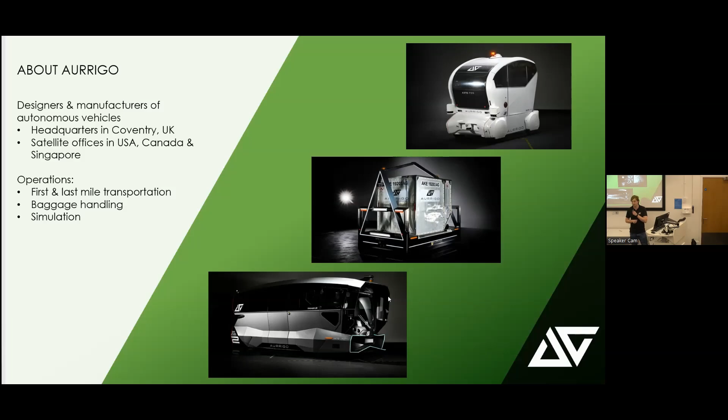So our niche is low speed enclosed environments - that's first and last mile transportation, meaning usually short transport from a bigger area of transport, like a train, to your final destination, whether it be the office or a stadium or something like that. Baggage handling is where a lot of the money is coming from at the moment - baggage handling in airports - and simulation as well, simulating airport operations.

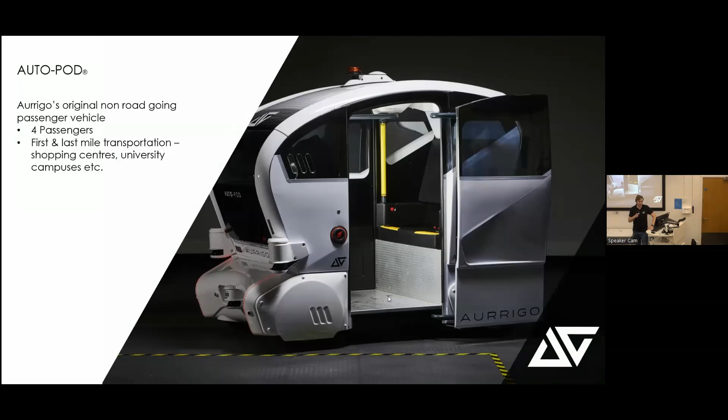I'll go over some of our vehicles. Our first vehicle that we created was the Autopod - as I said, it's for first and last mile transportation, and it seats up to 4 people. We have a larger version of this called the Auto Shuttle, which seats up to 8 passengers.

It's currently in use in the Czech Republic - it literally just finished this week. The vehicles are coming back as we speak, but we've just undergone a project in the Czech Republic.

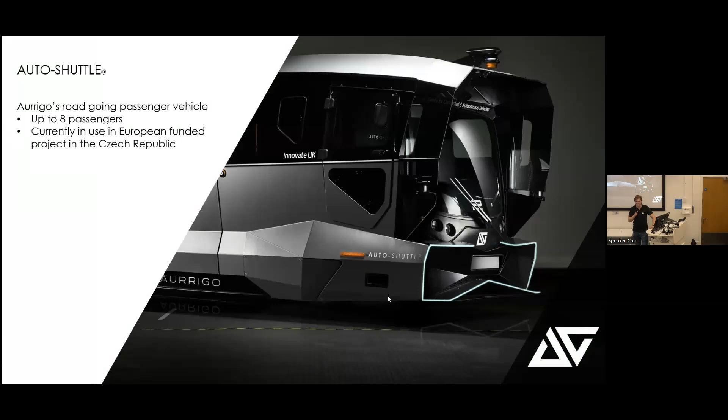This is our Auto Dolly. This was our first baggage handling vehicle that we developed. We trialed this initially in Heathrow and achieved very good results, and we are currently operating in Changi Airport in Singapore.

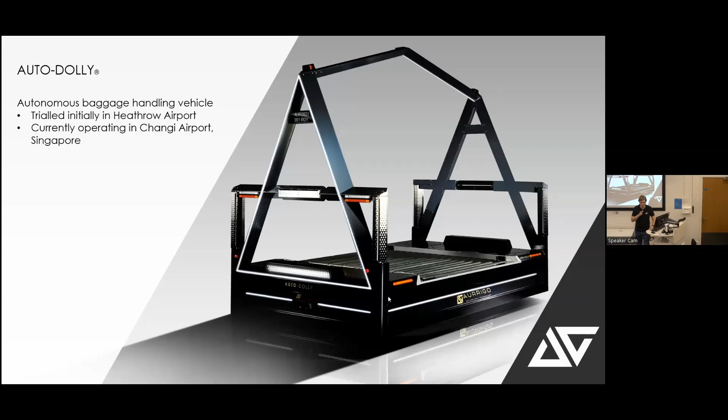We have the Auto Dolly Tug, which is a bit similar to the Dolly, except it's got more towing capability, so it can tow up to 3 manually towed dollies, each having a ULD. A ULD means unit load device - you'll see them at airports, they're essentially just crates that carry your baggage, and we take these from the baggage handling area to the planes.

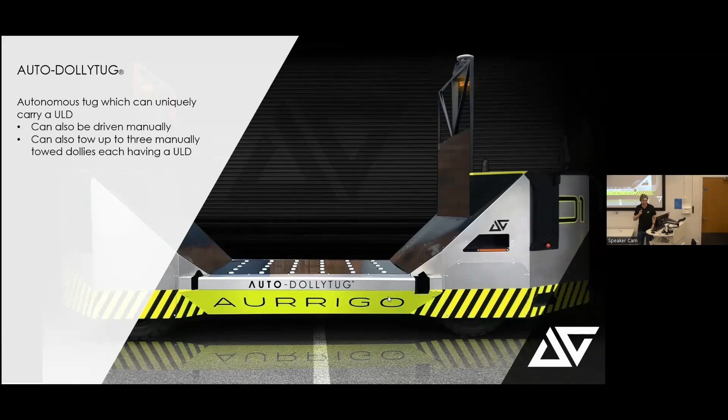I've got a short video describing how this works. If I just hit play.

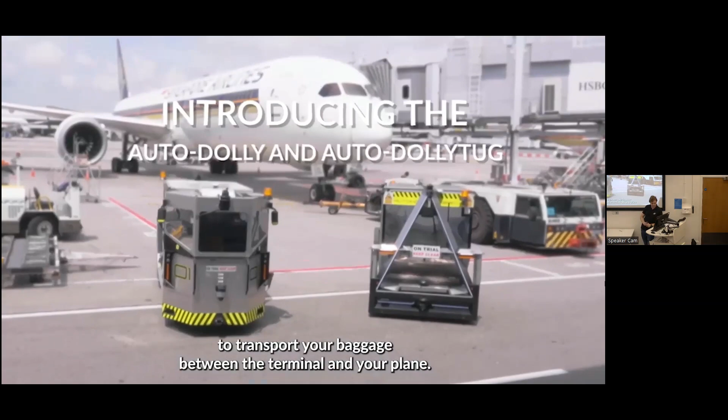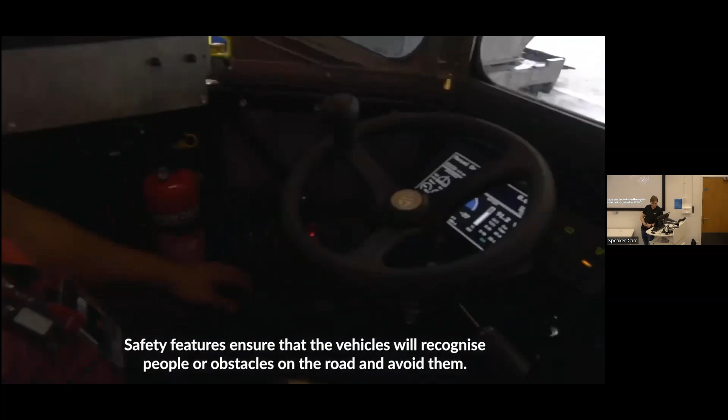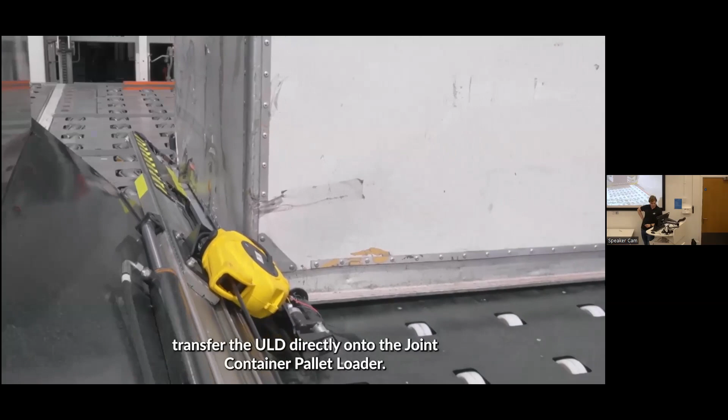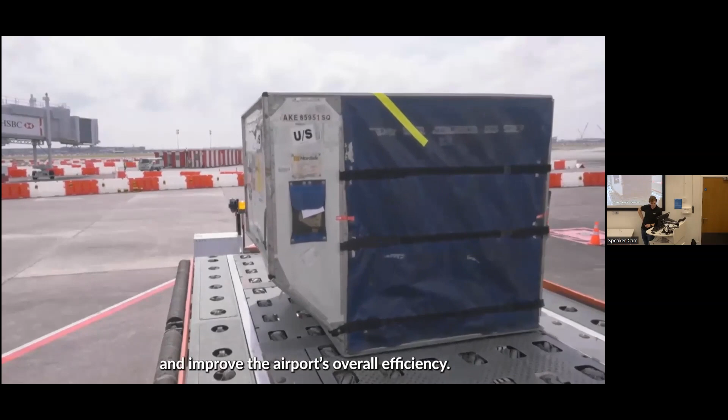Don't be alarmed if you see driverless vehicles when you next fly through the airport. They are part of a trial to use autonomous vehicles to transport your baggage between the terminal and your plane. These vehicles will first pick up a unit load device filled with your bags and autonomously move off to the aircraft stand. Safety features ensure that the vehicles will recognize people or obstacles on the road and avoid them. They are programmed to autonomously maneuver busy roads at the airside. At the stand, autonomous mechanical arms transfer the ULD directly onto the joint container pallet loader. With automation, drivers can be freed up to work on other critical functions and improve the airport's overall efficiency. Try to catch a glimpse of these vehicles the next time you travel.

I don't know if any of you are planning a trip to Singapore, but we are currently operating in Singapore, so you will be able to see us operating there. I love Changi Airport.

It's world renowned - oh, am I feeding back? Okay, no, here we go. Yeah, Changi Airport is world renowned, it ranks as one of the best airports in the world.

Singapore is massive on automation, not just in the air side, but in all areas - public transport and basically everything that they can automate, they are trying to automate, which is great for us.

Don't want to do that again.

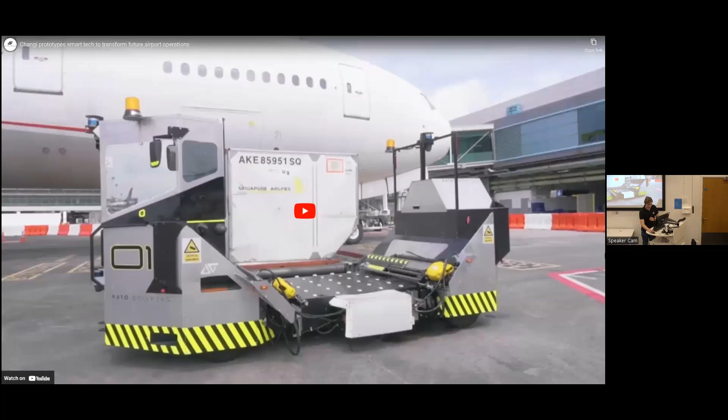So this is our most recent vehicle, the Auto Dolly Tug Mark III. This is the most recent iteration. As opposed to the previous vehicles, which have to be driven normally up to your baggage handling area, this can perform crabbing, basically sideways movement. The vehicle itself comes down onto caterpillar tracks and enables side-to-side movement rather than just forward and back using regular steering.

This allows it to also perform what's known as tank turn - essentially it can spin around on its axis by sending power in different directions to the caterpillar tracks. It can spin around and perform many more complex maneuvers that our vehicles couldn't previously do. And again, it's got robotic arms which can load and unload ULDs.

This is off to Singapore on Thursday, so I've been working today and we'll be working tomorrow on some final checks with the camera systems, getting that all set up and ready to go.

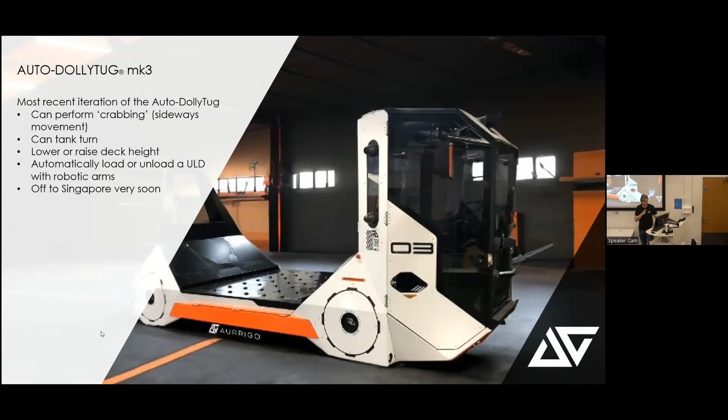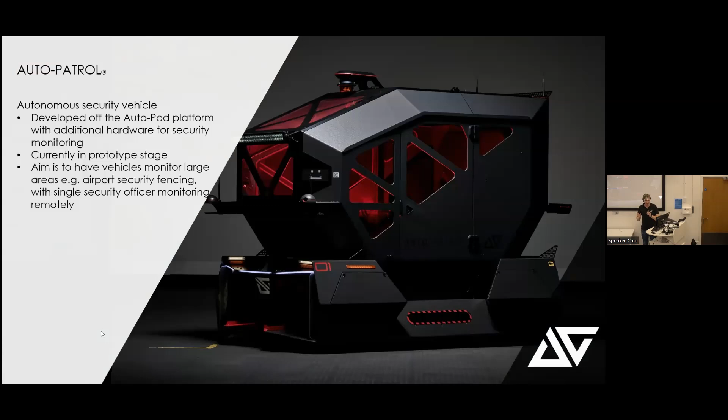Another vehicle we have is the Auto Patrol, based off our Auto Pod. It is a security vehicle aimed for monitoring large campuses, for example airport security. The aim is you could have a fleet of these vehicles traveling around the area you want to monitor, with a single person in a control room who can see the camera feedback from these vehicles and maybe even issue commands or warnings through the vehicles themselves.

I've just got a quick video of the Auto Patrol.

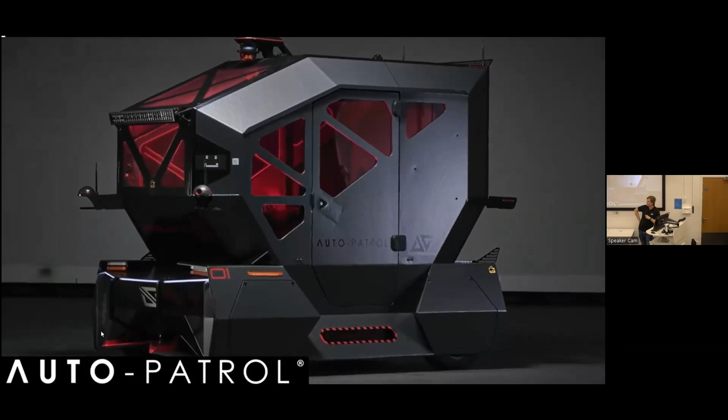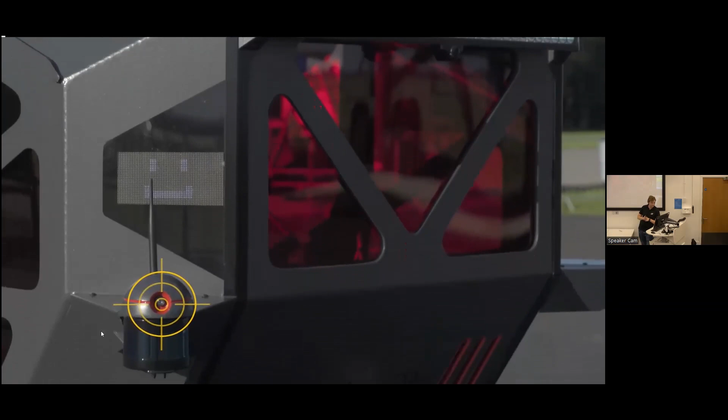Introducing the Aurrigo Auto Patrol, a vehicle to automate your security and reduce employee costs. Auto Patrol has been designed to enable autonomous, unmanned, remote security and surveillance. It has long-range, high-resolution stereo color camera, a tethered drone option, and LiDAR image detection. The vehicle does not require a driver or operator to be physically on board, which will decrease overall operational costs, and through the automated technology, improve the accuracy of security risk detections. The Auto Patrol can be operated autonomously or with onboard employees. Aurrigo Auto Patrol.

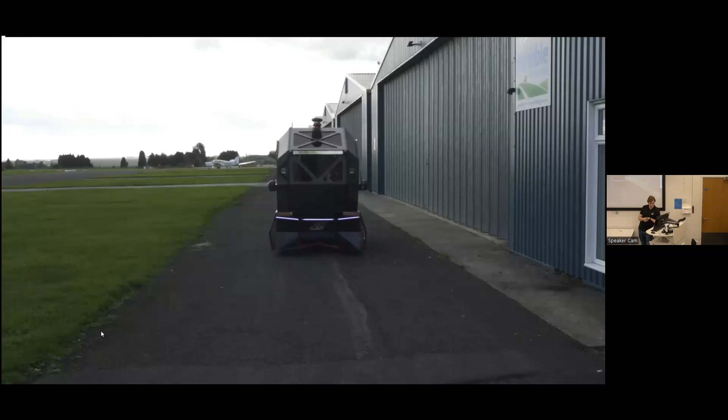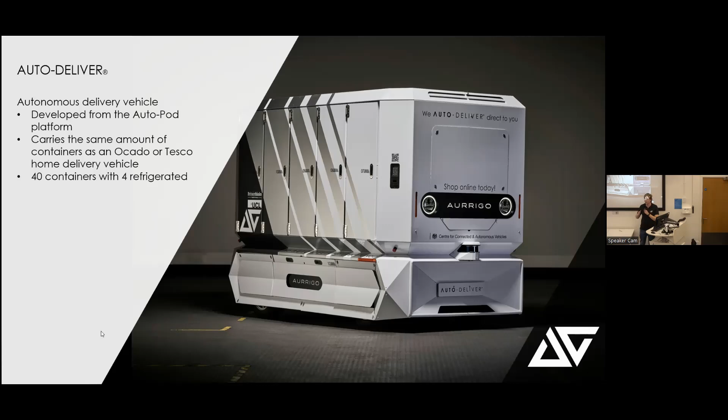Okay, so that's our vehicles. I think we've got one more, which is the Auto Deliver - essentially a delivery vehicle. It contains chilled and unchilled containers. Essentially it's similar to your Ocado or Tesco home delivery vehicle, except it's autonomous. This is just a prototype; we haven't gone into production on this just yet, as we're focused on our Changi operations.

And then finally, we do airport simulation, which is essentially a digital twin of an airport. This was born out of requirements for Changi Airport, where we had to model the airport and prove that our vehicles could operate autonomously in the environment, and that worked well. And we thought, why not scale this up to model the whole airport worldwide?

So our system shows clients how savings can be achieved by electrifying their fleet. It also shows you how the fleet travels around an airport, what kind of congestion can occur - say if you decide to close a gate, how that affects both foot traffic and vehicle traffic to the stand. So we're obviously working with Changi Airport, and we're also developing a simulation system for Grand Rapids Airport in Michigan, USA.

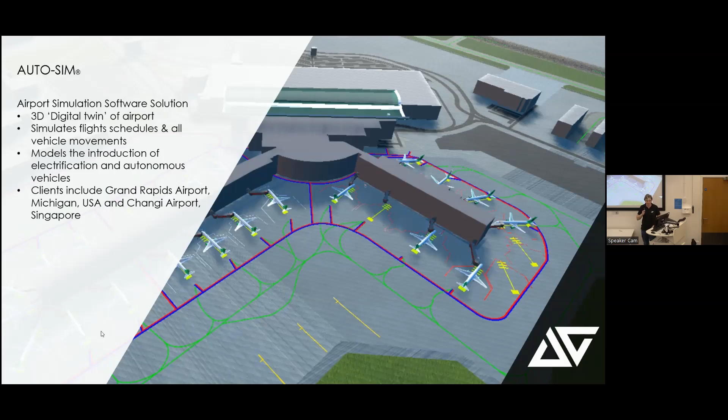So the main reason I'm here is to talk about academia and industry. We have a number of university partnerships, not just here in the West Midlands, but all over the world. Just some examples of our clients: WMG at Warwick, the University of Ottawa, and University College London, just to name a few.

So one great way of getting involved with academic research as a business is the Knowledge Transfer Partnership, or KTP. This is what I was part of when I graduated and joined Aurrigo. It's a 2-year project that links a graduate with a business and a research institution. I was the graduate, the business was Aurrigo, and the academic institution was Aston University. It's funded by the company, the university, and Innovate UK in a 1/3 split - great savings for the business, as we only need to provide 1/3 of the funding.

So my KTP was with Aston from 2020 to 22. It's got a fancy title: to develop and implement a sophisticated machine vision solution for autonomous vehicles in low-speed environments. Essentially, before I joined, the company wasn't using any sort of computer vision at all - it was solely reliant on LiDAR for all of its operations. The benefit of cameras is that they're cheaper and more readily available, but the difficulty comes in getting the information out of the box. A LiDAR can give you a point cloud - you can plug it in and it'll give you a point cloud there and then, whereas with cameras, you need sophisticated software to do depth perception and object detection, and that was the whole point of my KTP.

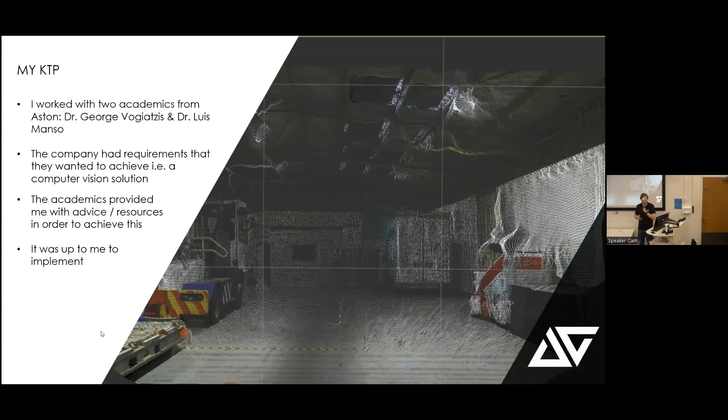I showed that monocular depth estimation could be possible, and that it was a benefit to their business, because usually stereo cameras are used for depth estimation. Stereo cameras by design require two separate cameras in order to calculate the disparity and therefore the depth. With one monocular camera, you only need one, so that's a saving of half on all your cameras if you were to implement a purely monocular-based approach.

I do have a video of the KTP. This might be a bit long, so I'll cut this off if it goes on too long. We'll see what happens.

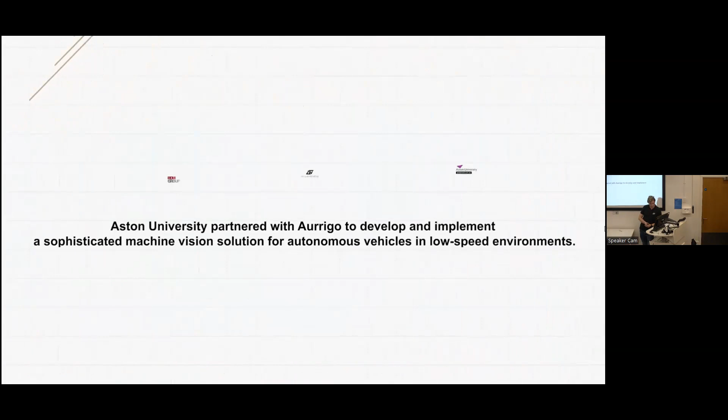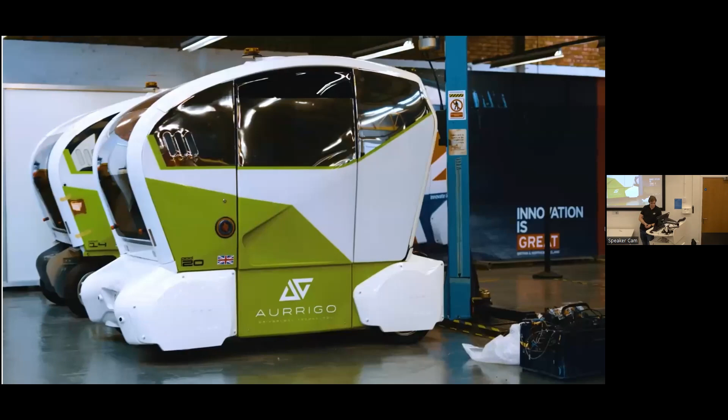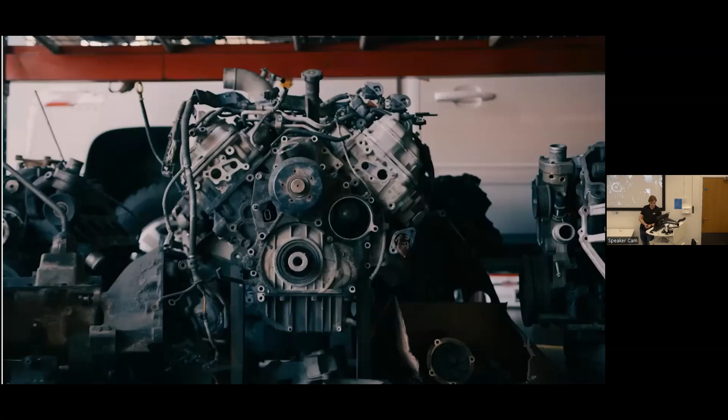My name is James Heaton, and I'm a machine vision engineer here at RDM. RDM has been in business for about 30 to 40 years. They've recently been making bespoke parts for other companies in the area, such as Aston Martin and Jaguar Land Rover, and recently launched a sister company called Aurrigo, which designs and manufactures autonomous vehicles, ranging from 4-seater pods to 10-seater shuttles. They're usually used for first and last mile transportation, and they also have a third product, the auto dolly, which is designed for autonomous baggage handling at airports.

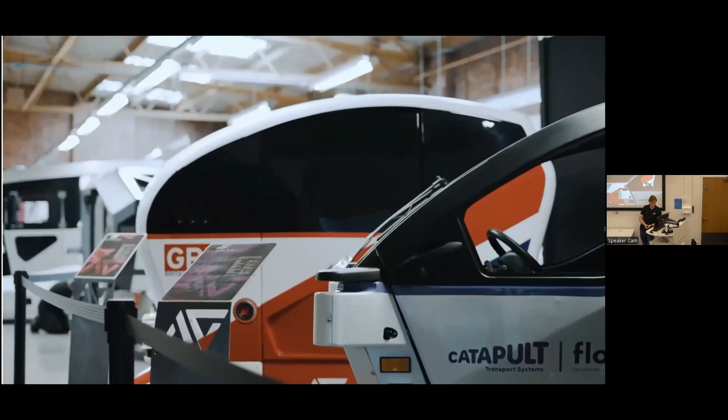This is a very innovative project because it's essentially trying to take an existing autonomous vehicle platform to a higher level of autonomy. So what we're trying to do is eliminate the need for a human supervisor to be there when things go wrong, essentially. We want the pod to be able to make those decisions autonomously without any need for humans to be present. A lot of our competition are either the manufacturers of the vehicles or from the operational side of it. As a company, we took a decision to bring this all in-house, so all of the vehicles are manufactured in Coventry, and we have engineers here currently working on that.

KTP is a self-contained project between a university and a company in a specific industry. I'm a KTP associate, so I've been brought in to complete a particular project, working with both the academics at the university and the management team here at RDM. Prior to me joining RDM, they had been using lots of different kinds of sensors on their vehicles, and the purpose of this KTP was for someone with some machine learning experience to come in and develop a camera-based system to detect objects and control vehicles.

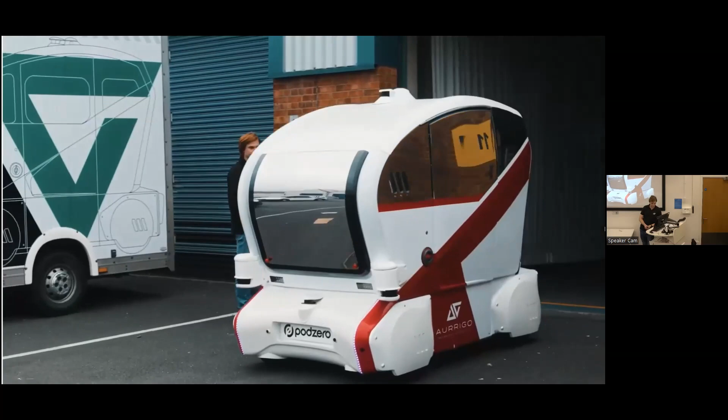So at the start of the project, we set out to achieve a few things. The first was to develop a simulation environment. That has been completed, and now the next step is to look at developing the camera-based perception systems using machine learning. The aim is to make these vehicles safer, cheaper, and more reliable, which only stands to improve the standing of Aurrigo going forward.

I think the biggest challenge for us academics has been to come to terms with the level of scientific rigor and safety features that need to be built inside these algorithms. Because it's all fine and nice when you're just developing a simple prototype, but when you're actually implementing something on a live vehicle that will be released amongst real people, you cannot afford anything to go wrong. So for us, proving that the algorithm does what we wanted it to do was quite a challenge.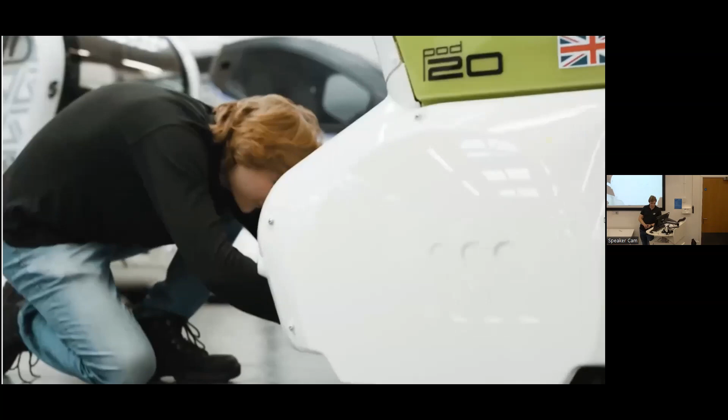Working with both industry and academics means more support whenever I have a problem. For a place like Aston, this type of ethos is almost built into the fabric of the university. We've had quite a lot of involvement with industry almost from the very beginning. All of the work that we end up doing in terms of research either has a very strong applied segment or leads towards some strong application area, which means that with all of the work we do, the end user and the end system that is going to be built is always in our minds.

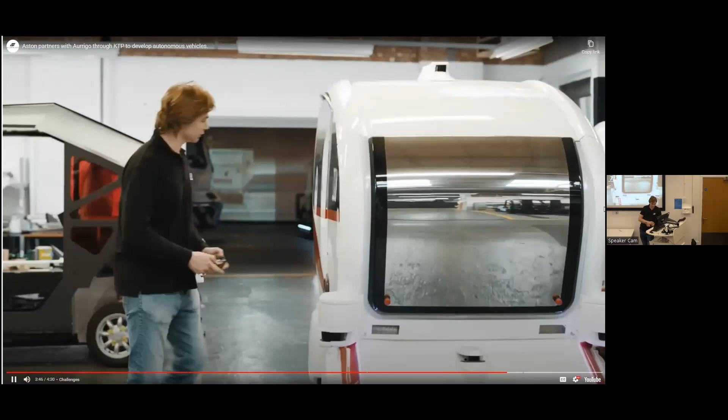So the nice thing about these KTP projects is that it takes this idea to the next level. So they fit very well with our understanding of what research is really meant to be doing, meant to be solving real problems, not just being able to prove that you can generate data.

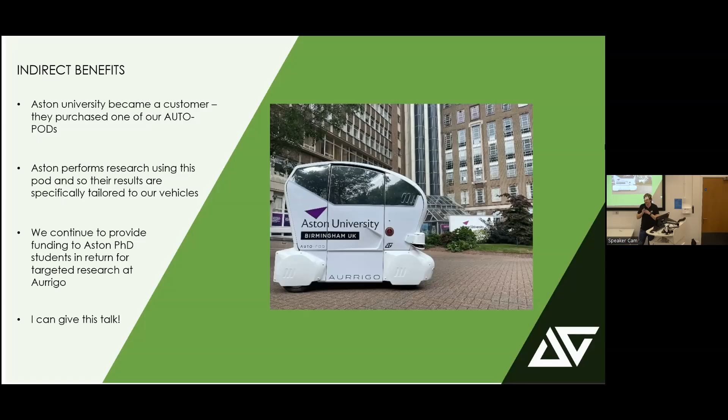So for PhDs, we've been working with them over the time I've been at Aurrigo. We've had PhD students come and go. One PhD student has just completed a work placement with us - he was doing a PhD at the Aston Photonics Institute, working with LiDARs. LiDAR is still very important to us, even though we have the camera system - we still use LiDARs a lot of the time. One of the difficulties with LiDARs is working in the rain and adverse weather, especially in Singapore where it rains heavily quite a lot. We want our vehicles to run as effectively as possible, so he developed a solution for an automatic rain cover for LiDAR.

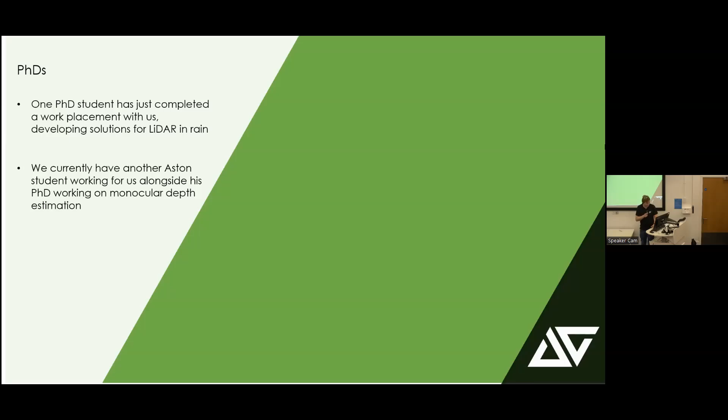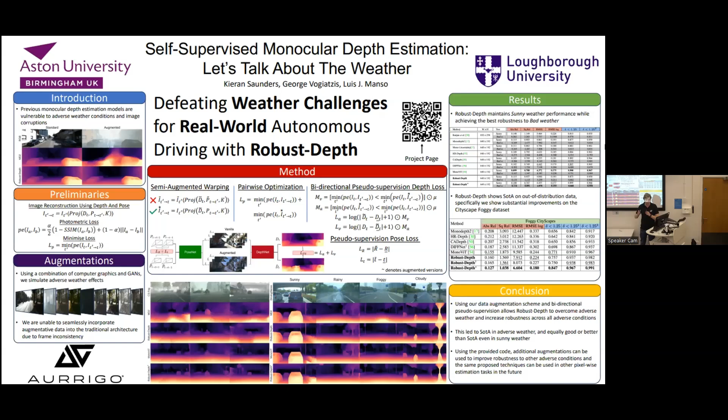We also have another Aston student, Kieran Saunders, who's working on following up from what I did during my KTP - monocular depth estimation. This is his poster that he's presented at conferences. I won't go too in depth, but the main aim of his project was creating a robust monocular depth solution that handles adverse weather. A lot of work has gone into creating the training data, with lots of augmentation using various weather patterns, using not only computer graphics but also GANs to generate augmented images and feed that into the network. His research has provided a solution that's not only better for adverse weather, but can also perform just as well, if not better, than monocular depth in clear conditions.

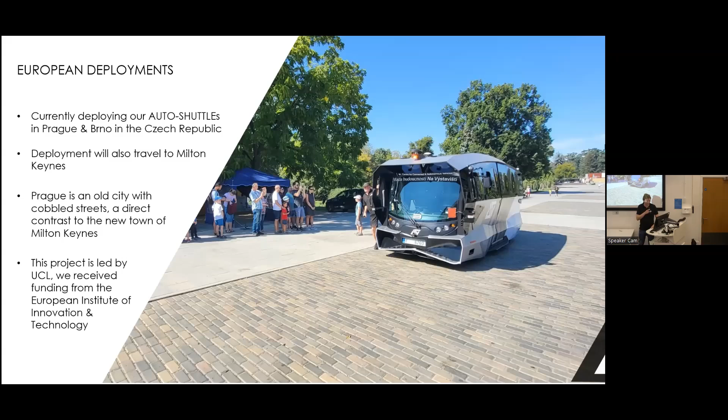Yeah, I think that's it.

So not only Europe, but we also work with organizations and universities in Canada. We had almost exactly a year ago, we IPO'd on the AIM Stock Exchange. We were actually awarded Best Newcomer just last week following that successful IPO.

As a result of this, we want to expand, but in order to expand, we also want to be able to source the best talent. So we have signed an industry collaboration agreement with the University of Ottawa, which gives us access to the university's resources, but also enables students to work on autonomous vehicles to supplement not only their academia, but this benefits us.

Whatever research and projects they are working on are directly tailored to our vehicles rather than our competitors. So in conclusion, we're not going to just throw money at academia just for the sake of it. We want to see a tangible benefit to us as a company.